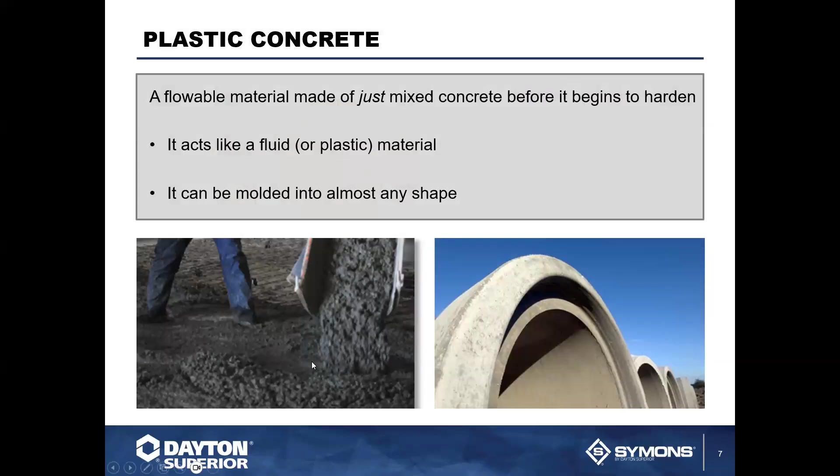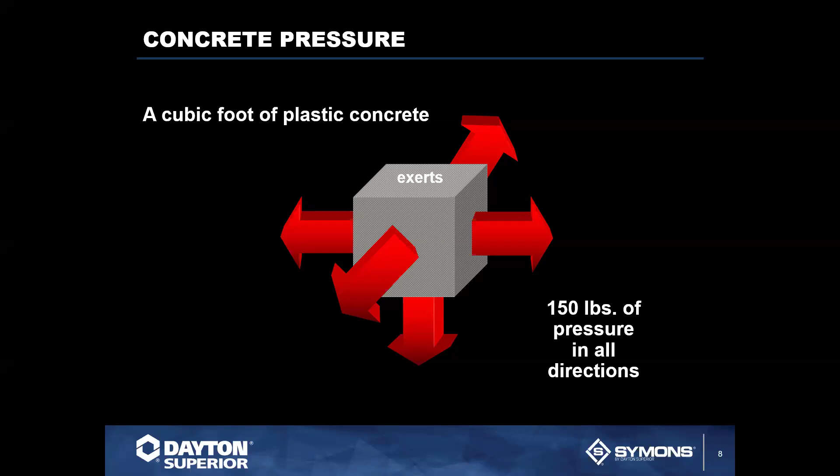So concrete typically exerts a pressure, about 150 pounds of pressure in all directions. That pressure increases as you increase the amount of concrete that you're putting in height-wise. Width-wise doesn't make a difference. If you only have a foot of concrete, it's still only a foot of concrete, so it's only exerting the same pressure. Pressure only increases when you start putting it in a vertical form, like a concrete wall. So that pressure would increase as you pour the concrete wall.

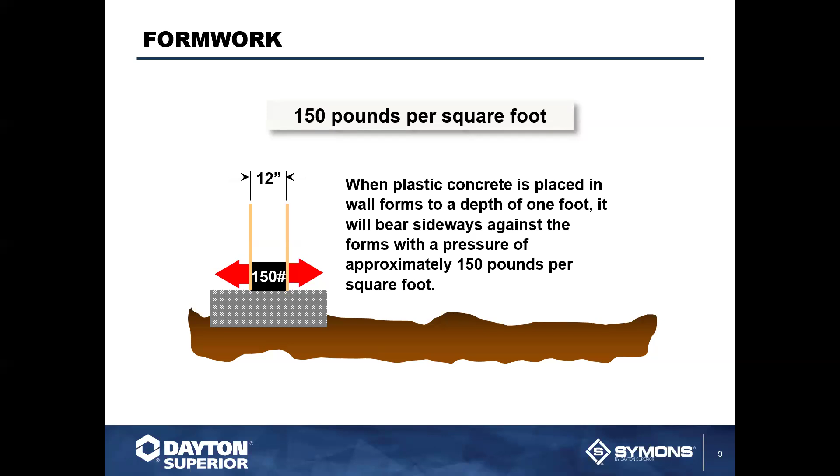So you're going to run from 150 pounds per square foot on the top of the form, but it's going to increase by 150 every foot going down the concrete form wall. So what'll happen is you actually will have up to 900. Depending on how high or how fast you're going to pour your concrete, you have to be very conscientious of how much concrete you're actually pouring and what the height of that system is.

So, you're talking most plywood forms. Typically, you're talking 3/4 inch plywood and 2x4 studs and rails. You're talking a 600-pound load rating. So that means you're limited to about 4 foot of concrete per hour. Symons Steel-Ply, you can go 1,000 pounds, so you're limited to only 6 foot 8 inches per hour.

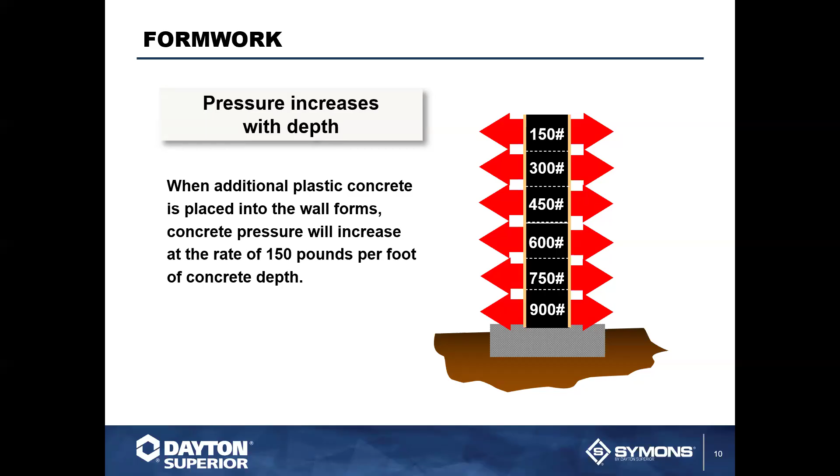Now, all the forms are great. Plywood forms, Symons steel form, Steel-Ply, all of these systems are load gathering devices. If you do not use the right number of ties to counteract the concrete form pressure, you will have a problem. So typically you have to make sure that you have the right number of ties to alleviate any of this form pressure that's being put in place here.

Now, ties typically come in, you got snap ties at 2,250 pounds, the 3,350, 4,500 pounds for a loop tie. You get into 19,000 pounds for taper ties and so forth. So there's a multitude of different ties you can use. And at Dayton Superior, we manufacture all of these different types of ties.

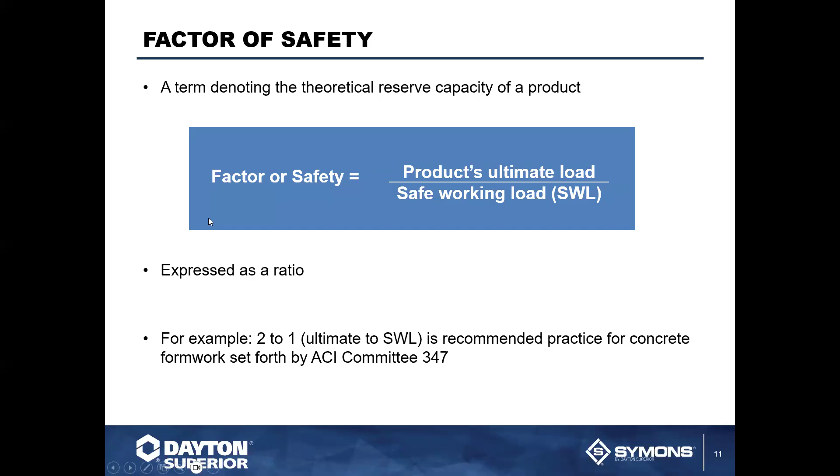When we manufacture a tie, it has a factor of safety involved, which basically means you're taking the ultimate load of that tie where it fails and dividing it by what you're looking for, a safe working load. And usually this is expressed as a ratio. So typically you're always going to see a 2-to-1 safety factor for concrete form work. Well, 2-to-1 is what is dictated to Dayton by the concrete gods of the industry, the people that actually set forth what we have to design by.

But some of the other things that we have to take into consideration is we look at breakbacks and testing. And this is something that Dayton does on a regular basis when they fabricate ties: they actually do random testing on their product to make sure that the ties are being made properly with the proper breakback, with the proper strength of the wire. Because wire is not very homogeneous when you get steel wire in from the factory.

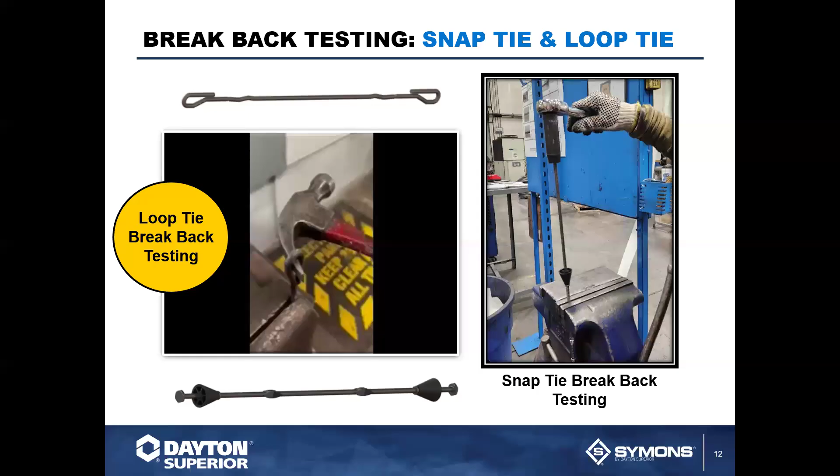You draw it down to actually get the tie diameter wire that you're looking for, and then you shape it and bend it, weld it, etc. Well, all these nuances of drawing, bending, welding, you may have to upsize it a little bit here or there. All these processes could influence the overall strength of that piece of wire. Now, 10 foot down in the coil or 30 foot down in the coil, it may be totally different. But at that certain point, you have to make sure that you are within standards. So that's why we have a 2-to-1 safety factor included within the ties.

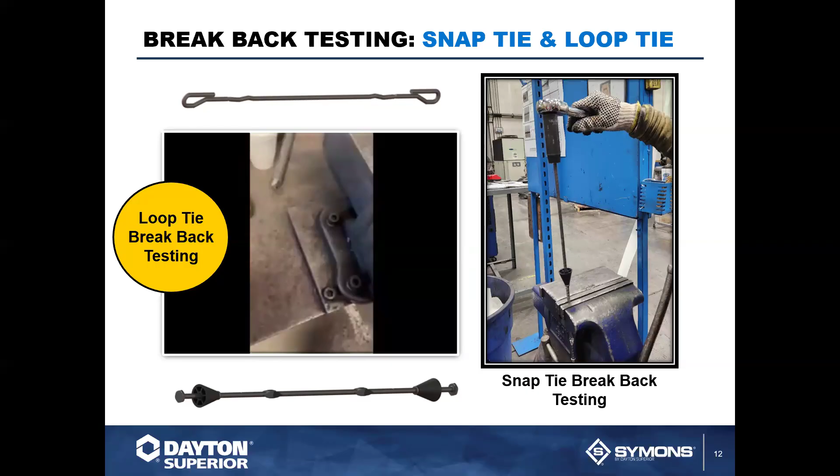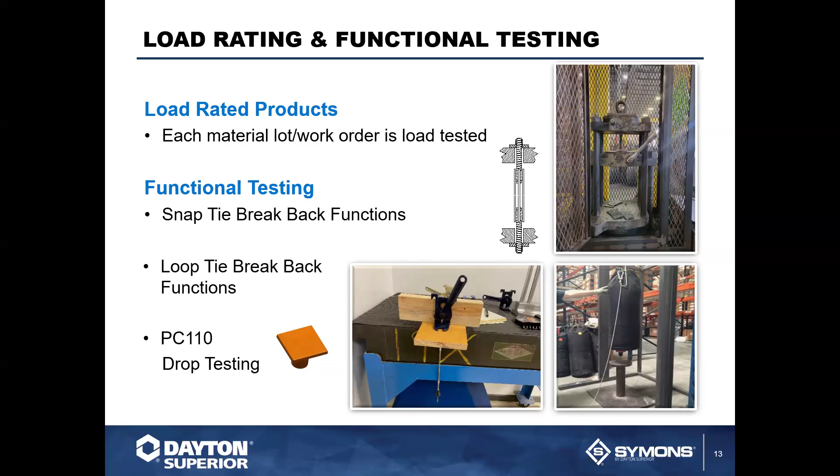So every product we supply actually has a load rating. So we actually load rate the ties, whether it be a pull test, similar here, but we check the breakbacks, we check button heads, we check all of the different functions, even simple things like the plastic PC 110, the impalement cones. We have to make sure that those follow certain requirements to meet OSHA requirements. So those are all things too that we take into consideration with how we develop them going forward.

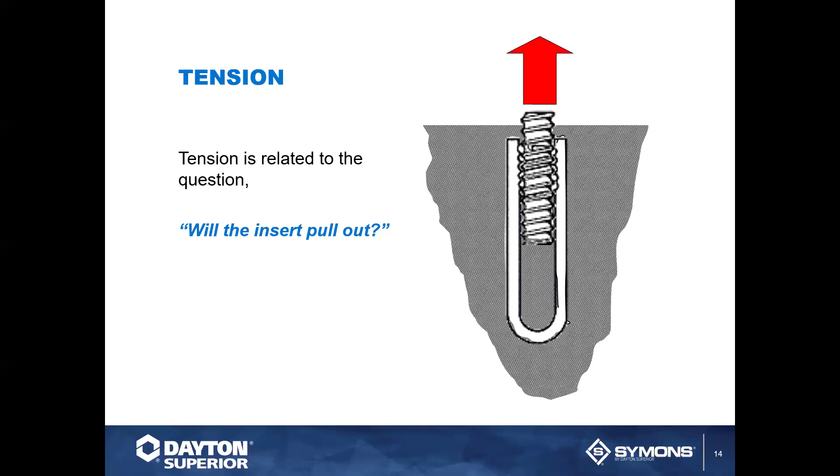What we're looking for is that everything actually entails a tension load. Tension load is typically what you are putting a snap tie in, or a coil tie, or a loop tie, or anything in when you start loading it up with form. Tension is when you're being pulled in the direction of the tie, not across it, but it's actually being pulled from the bottom to the top, or whatever the orientation of the tie is. Inserts would also fall into that.

You're also going to have to worry about shear. Shear is when your cross load is coming in. When do you have more shear than not? It's typically going to be when you have lifting hardware put in place and you are going to lift at a different angle, because we all know that when we sell product to the contractor on site, a lot of times they don't have spreader bars on site. So what they'll do is they will take a long cable and run it up around the picking device from one end to the other and pick it up.

They're going to have an angle that they're picking at. Well, when they pick at that angle with the lifting hardware, you're actually decreasing the capacity of the insert because you're putting it more into shear. Most of the products that Dayton Superior makes and every other manufacturer makes are very good in tension. They are not all that great in shear. Shear is actually not friendly to metal products. Shear is the one item where you'll find the capacity of even bolts, etc., in shear is much lower than the tension load that it'll actually carry.

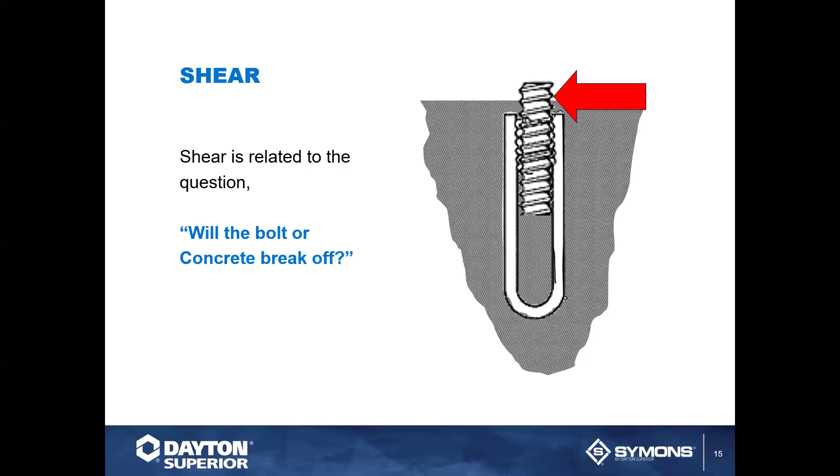As I said, we follow the direction of American National Standards, ACI, and obviously OSHA involved here. OSHA is kind of the one big different one here. They're the only ones that can actually fine the contractor or the manufacturer, et cetera, for not abiding by current regulations. And current list of factors for safety on most products that we make: you're looking at lifting hardware and anchors used more than once, which means those are going to be more or less geared towards a precaster, versus 2-to-1 for a standard like a tilt up guy where he's going to only use that insert once. He's only going to lift with it once.

Same insert being used for tilt up is only worth 50% if it goes to a precaster because the precaster is going to be lifting with it multiple times. You have 3-to-1 for permanent fasteners, 1.5-to-1 for bracing and pre-stressing, 5-to-1 for lifting hardware. Now, the other thing you have to look at on this list here is 2-to-1 for all concrete forming accessories. So that means any of your ties, your nuts, your bolts, etc., all have to have a 2-to-1 safety factor involved with it.

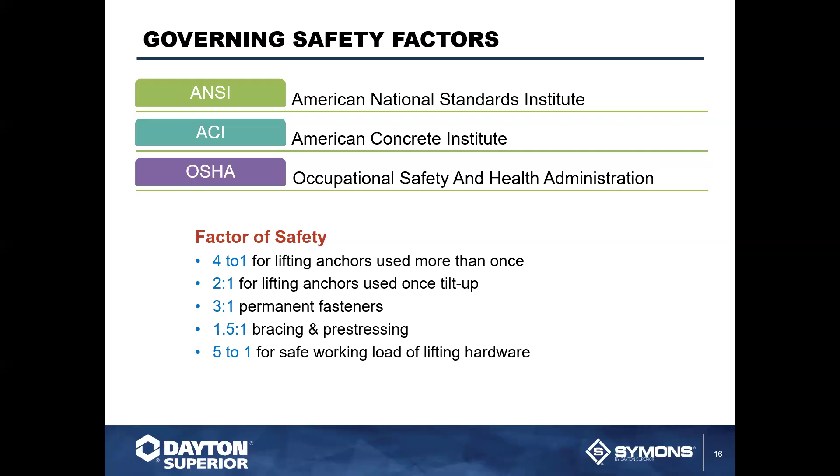Lifting being a major part of hazards on job sites, you never want to lift with a utility anchor perpendicular to the direction of the pull. So basically, when you have your insert located, you want to make sure that you follow guidelines within those parameters of what you are looking to do with that lifting; what the insert is designed for and how it's used have to be synonymous with how they want the product actually placed. Sometimes you can actually install a product here and obviously it can be mislifted by the contractor, primarily because of how it ended up on the job site, how it came off the truck or whatever. So certain inserts typically are not designed to be lifted in a certain direction.

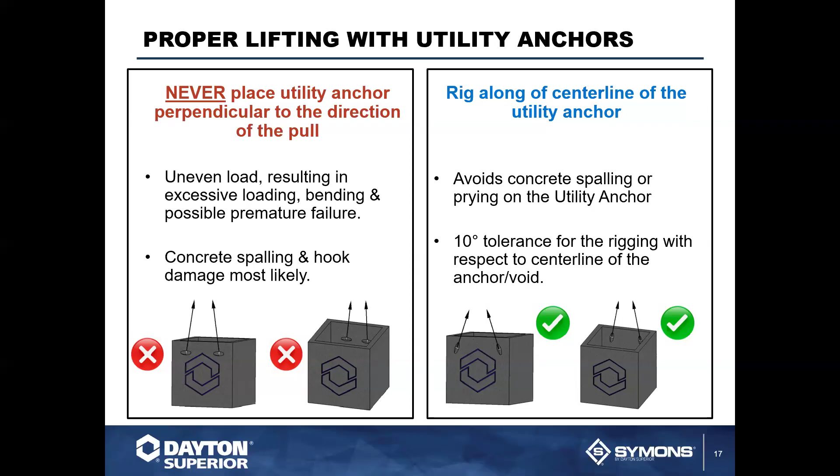So with that, at Dayton Superior, we actually have these guidelines within our handbook that are readily available for you, basically telling you how the utility anchor has to be lifted, positioned, etc., to actually accompany the lifting of the product that they're looking for. You're going to see proper lifting with utility anchors, whether it be alignment or positioning within the concrete itself, primarily because utility lifting is done solely by the contractor.

You're going to have clevises and chains, etc., actually being used by the contractor. That's a system that doesn't require select lifting hardware. So you have to follow a different set of, I want to say not rules, but you want to be a little bit more careful because with that system here, you don't have a distinct piece of equipment that you're using. So when the contractor actually gets it out there, he's got to basically follow certain rules so that he doesn't damage the concrete in the lifting process.

Positioning is critical for a lot of products here, depending on what you have. You see guys do a simple column, basically a square void here, and they may have a set of 4-ways on the job site to actually pick it up and move it. A circular column may get picked up and dropped into place and then used with a grout sleeve or a concrete anchor of sorts.

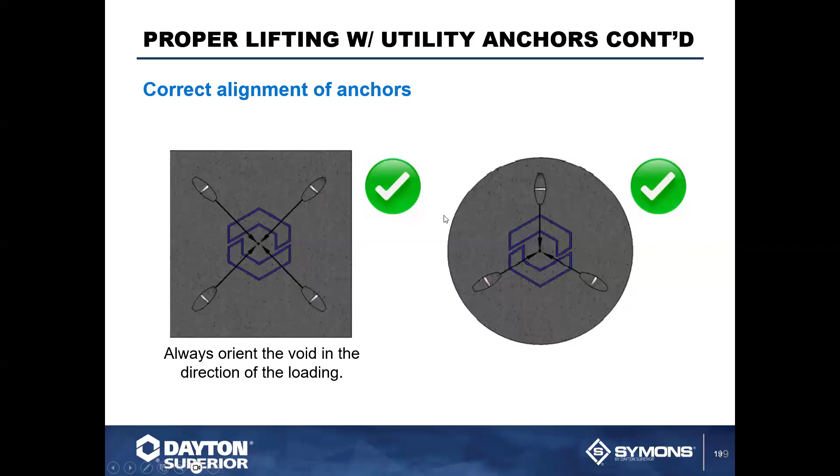How you lift will determine the angle that the product will come in at and how it's going to be placed. So the lifting is actually very critical on a lot of these component pieces, and we can actually help you with loading, etc., with these products and how proper application is being used.

Like I said, I was talking earlier on the utility anchor, how you Crosby hook in place here. You have to be very careful not to point load on the concrete with the Crosby hook. Two things can happen: one, you can fragment the concrete, and two, you can crack the Crosby hook because you're lifting at an angle that is not uniform within the standards that Crosby puts forward on their hook. Crosby Hook, if you're not familiar, is probably one of the largest hook manufacturers in the country. They're kind of like the Kleenex of the industry as far as lifting hooks and shackles and so forth.

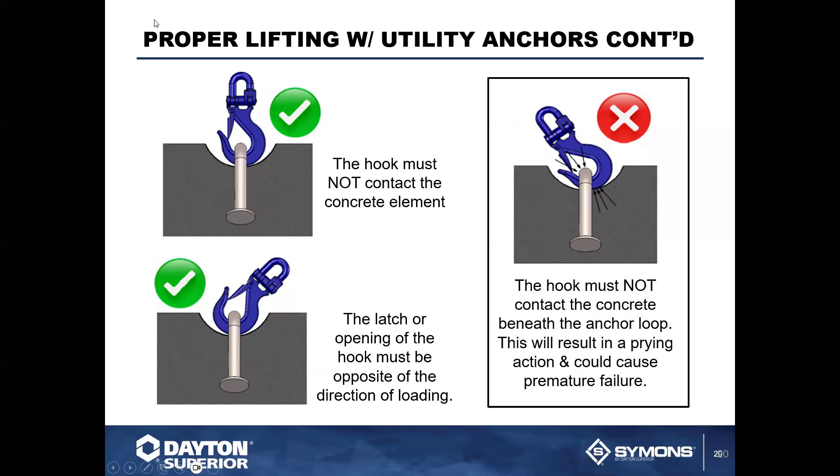Some of the things that people don't realize here at Dayton, we actually have our quality team here at Dayton Superior, within the corporate office, run tests on products that are typically brought in place. Whether it's a domestic product that we make here or a product we source from overseas, a lot of those products run samples, and we run tests on them to make sure that they comply with our safety standards and our application standards.

So we do a lot of testing here. We constantly see our guys in the back, our design engineers, our testing engineers, the quality control team, our chemical engineering team, and customer service and technical service people. They're constantly running tests on products that we manufacture to make sure that they conform to our standards within the parameters that are set forth.

So you're looking at loop ties here, coil ties, with any of the ties typically, and even inserts, we pull them. Best way to do it is pull it till it breaks. Being a big kid in the industry, it kind of is one of those things you go out back. These are just big kid toys. I mean, the guys go out here and they pull this product until it actually fails.

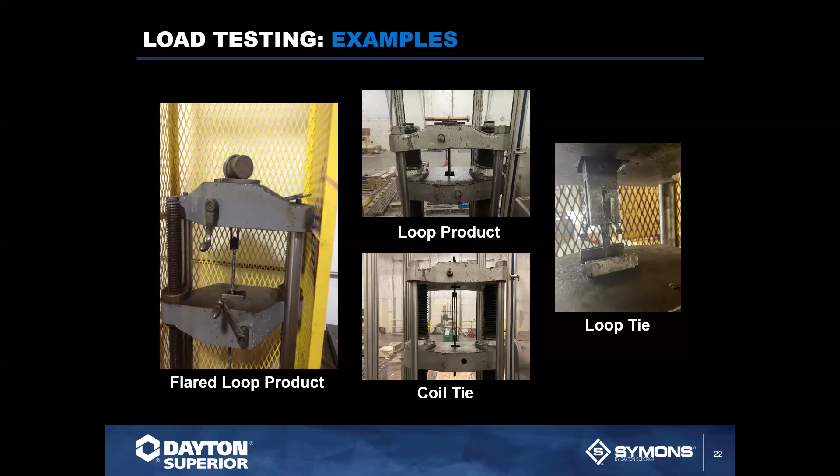So they're going right to the full ultimate load on this product, which is kind of what you want to do. You want to make sure that this product has a 2-to-1 or 3-to-1 or 4-to-1, depending on what the safety requirements are for this product. You want to make sure that this product actually works to that point or even surpasses it. So if it falls short of it, we are not shy about pulling a product because it does not meet our standards.

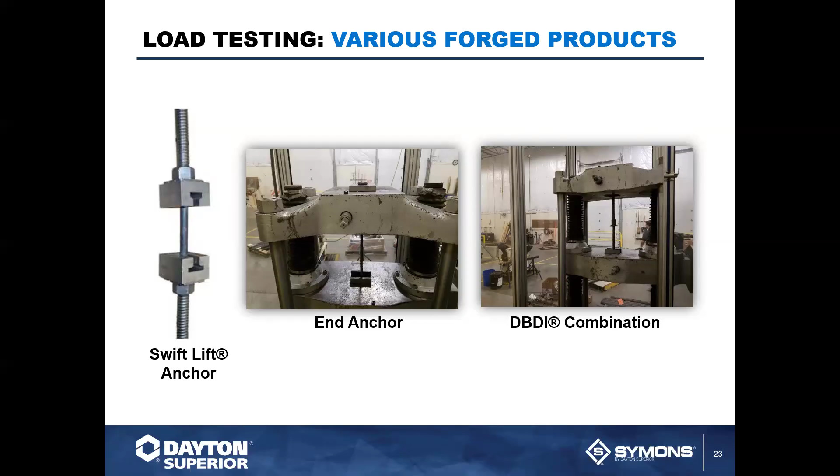So we run various tests on all of our precast components, on our forged products, and even on our tapered thread machines to make sure that they're actually performing at the best performance level within the industry.

Now, one of the things that people do not know, even a lot of people throughout the industry, contractors, precasters and dealers have bought lifting hardware in the past. And they typically have it and they use it and they reuse it and they reuse it. Well, a lot of these products have a tendency to get worn. The industry is not gentle with its equipment.

So basically, if we're talking any of these products here, you've got what we call a recertification, especially of tilt-up hardware and precast hardware. If you have lifting hardware, you can send it back into Dayton, get it inspected, proof loaded, and recertified. There is a small fee for this, but it's very minute compared to the cost of either a failure or even new hardware. This is going to tell you exactly where your hardware stands, whether you may have a problem with it or if it's still in good working order.

So we typically do this on the T120. We'll do it on the P91S, which is for precast, and on our P51s and P50s. These are all the lifting clutch hardware that typically get reused constantly, and these are products that typically go from job to job.

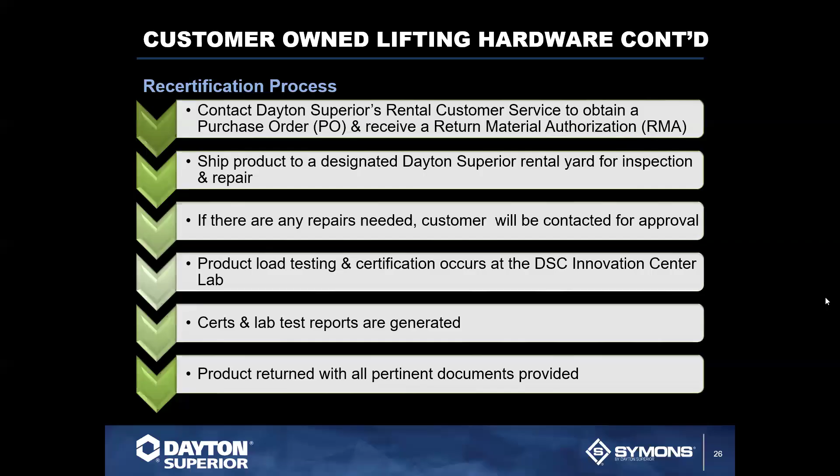The inspection and repairs are performed basically according to inspection procedure work instructions, the same inspection processes we go through on our own rental products. If we send lifting hardware out on a tilt job and it comes back, we go through an inspection process before it gets sent back out. This is the same type of inspection to verify the safe working capacities of that product.

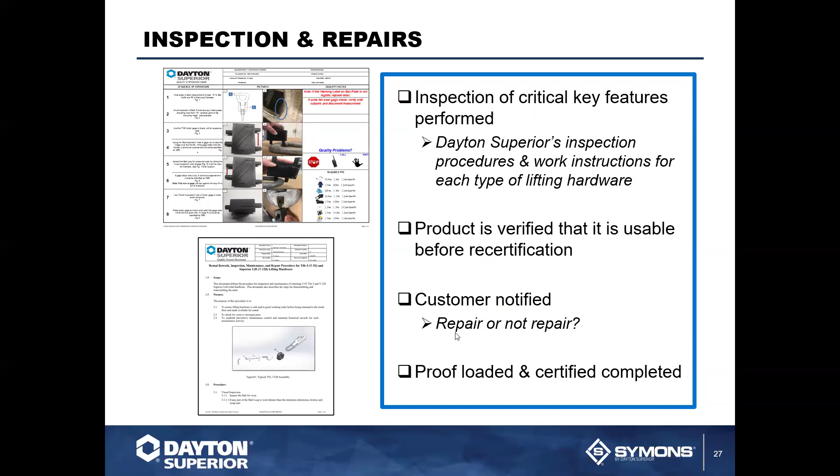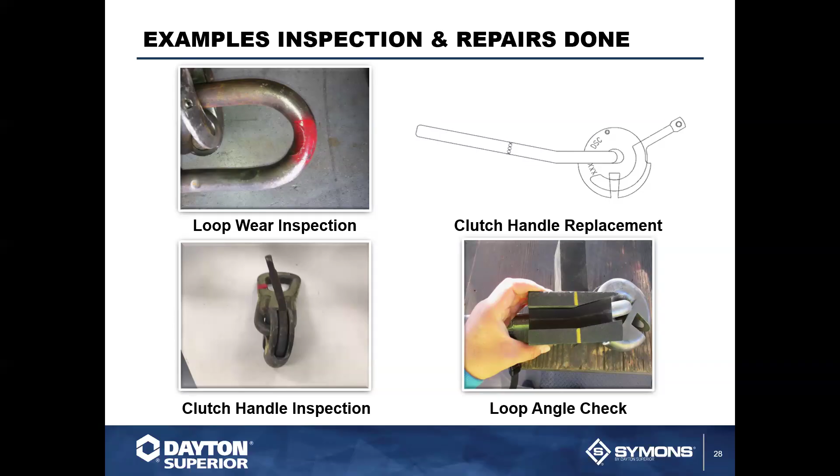Various things we look at include the loop wear on the inspection, whether it's been elongated, the clutch handle, and the lifting pin that makes all the connection. We also check to make sure the bail is not bent out of specification from being used and tossed around on the job site. Those are all part of our inspection process.

We will also proof load it to make sure it will still withstand the required capacities. We lift it to the safe working load, actually 200% of the safe working load. So if it's a 4-ton, we're lifting it to 200% over what the safe working load is. In lifting hardware you still have a 5-to-1 safety factor, so there's more safety factor involved, but at 200% we're surpassing what the capacity is designed for.

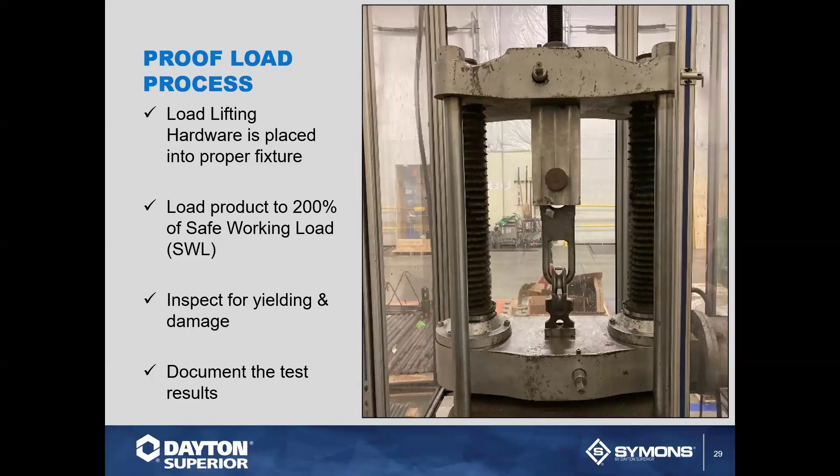The resources we have available include DaytonSuperior.com, where you've got all of our TDSs. For any chemical products, quality is checked to make sure products coincide with what we have on our TDSs and SDS sheets, which are all readily available online at DaytonSuperior.com.

If you have a question, there is a map on the website that's interactive based on your region, giving you the name of your sales rep, the customer service phone number, reps in the office for customer service, and technical people in the system. It'll even give you Heidi's and my phone numbers for contact, so feel free to go to those maps, find who you're looking for, and give us a call.

I got fast fingers today. You do. Maybe it's me messing with you. Do you know?